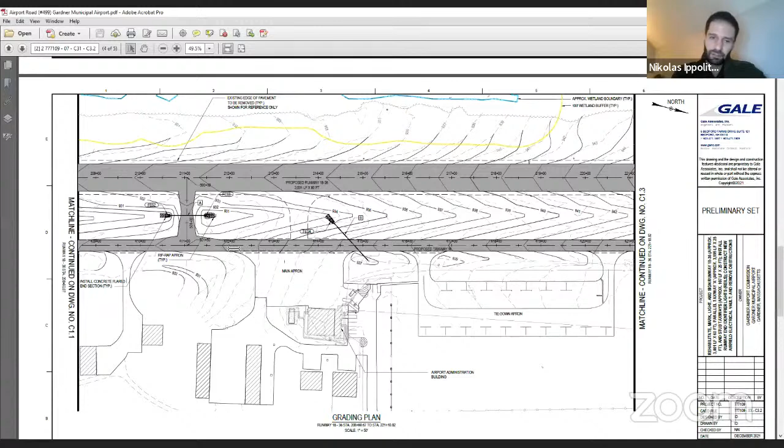We're relocating this one as well because there's aircraft parking here, so to avoid that direct runway access, we're moving this stub taxiway. Then reconstructing what's on the end here, again removing approximately the same amount of impervious surface.

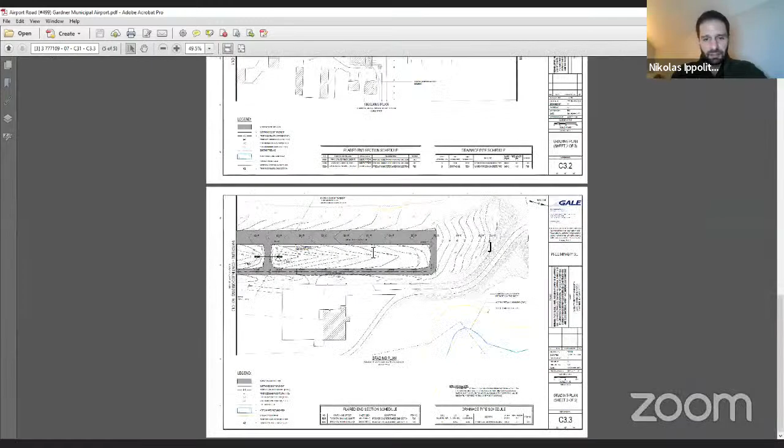The only area within the wetland buffers is on the southern end of the airport. There is a small section of the taxiway that impedes in the 100-foot wetland buffer, but aside from that, we do not anticipate any impacts directly in the wetlands.

About how many feet is that in the wetland area? I just want to know how much it is beyond the runway into the wetland area. Is it under 50 feet or over 50 feet? You're in the buffer zone, in the actual wetland? In the buffer zone.

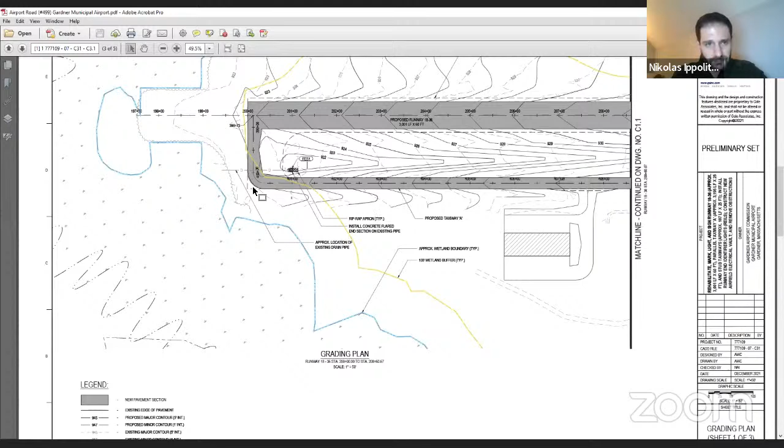I don't have it scaled off of this, unfortunately. The width of the taxiway is 25 feet. So I would say from this inflection point right here, you're looking at about 25 feet into that buffer area, maybe a little further in this area, but I don't think you get closer than 50 feet to the actual wetland line.

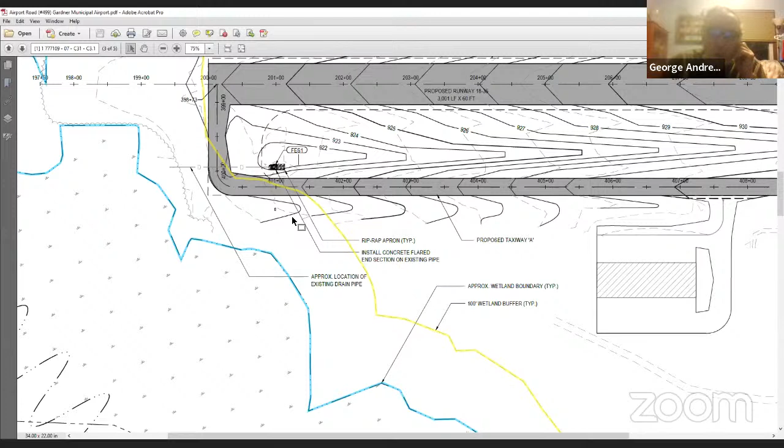So is it going to make the runway shorter than what we presently have, or is it making them longer? It's staying the exact same length, 3,000 feet, and it's actually getting a little bit narrower. So if anything, you would exclude some of the larger aircraft that might have come here in the past, so there'll actually be less large aircraft.

Amanda, any questions? Dave, no. I've studied these prints pretty good, and I think everything falls correctly. I don't have any other questions. Okay, anybody else have any questions?

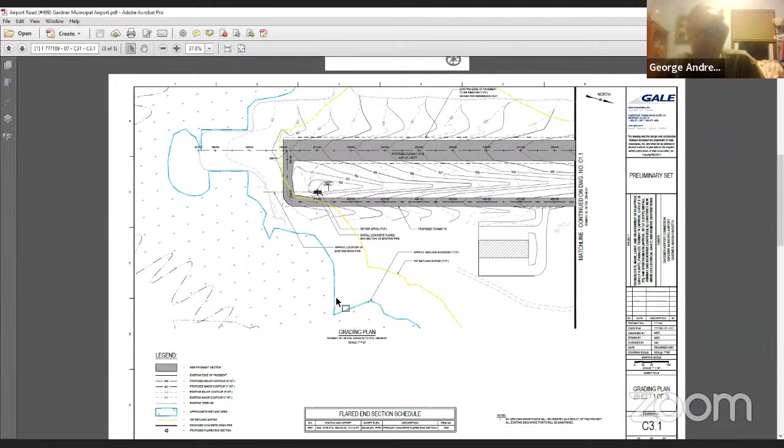All right, nobody. Okay, can I get a motion from one of the members? I'll make a motion to accept the project. Amanda? Seconded.

Mr. Andrews, just to clarify with an RDA, this is a negative finding, correct? Yes, I was just going to say that, a negative determination. Okay, I just want to make sure I do the right paperwork. Yeah, Dave forgot to mention it, yes, a negative determination.

All those in favor? Aye. Aye. So voted, and that should take care of it. Is there anything else anybody has to ask? Nope. Okay, all right, thank you.